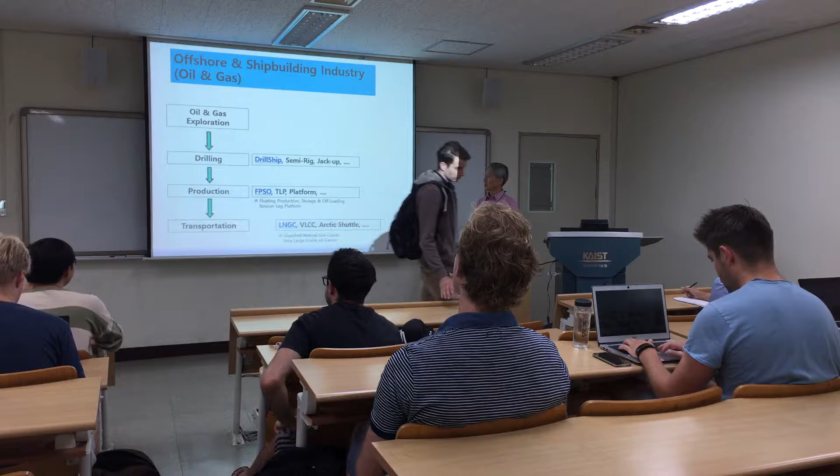In the transportation stage, it's very traditional. You need LNG carrier or crude oil carrier. LNGC is a liquefied natural gas carrier, VLCC is a very large crude oil carrier. Recently we're trying to cover the Arctic Ocean because there are remaining oil and gas reservoirs there.

Now they're including offshore industry along with traditional shipbuilding industry. Shipbuilding division and offshore or ocean plant division are different; they are separated out inside the shipbuilding company.

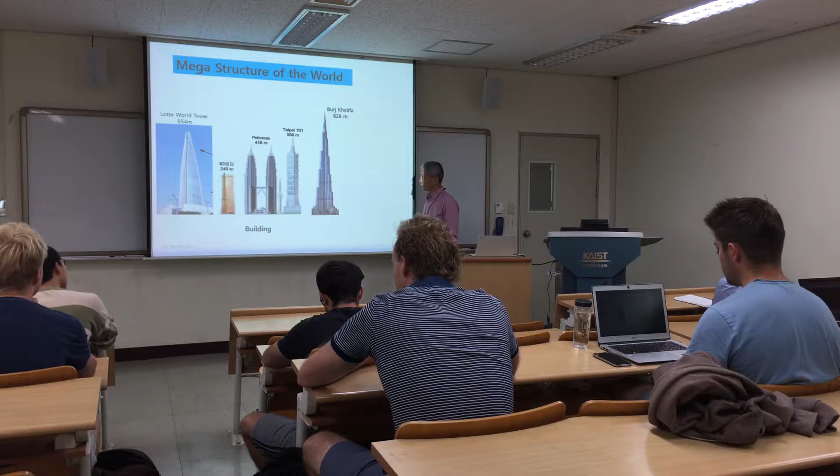Shipbuilding industry too. This is a mega structure of the world. This is the new tallest building in Korea, just opened in the Seoul area. It is about 100 floors.

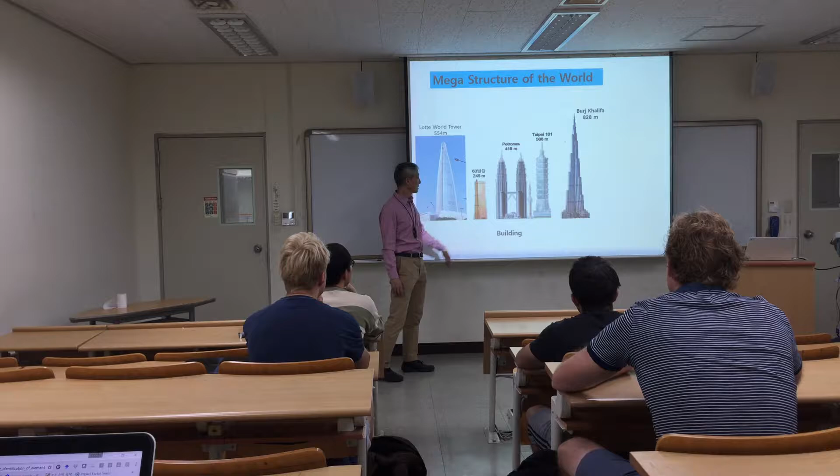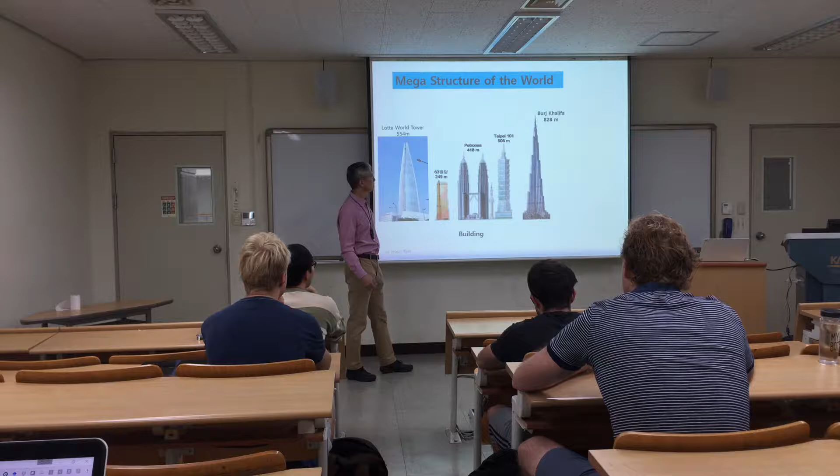Just before, up to last year - sorry, this is Korean - 63 is the number of floors, the building name is the same, and that was the tallest one in Korea. But Petronas in Malaysia, Taipei, and Khalifa in the Middle East are also tall buildings.

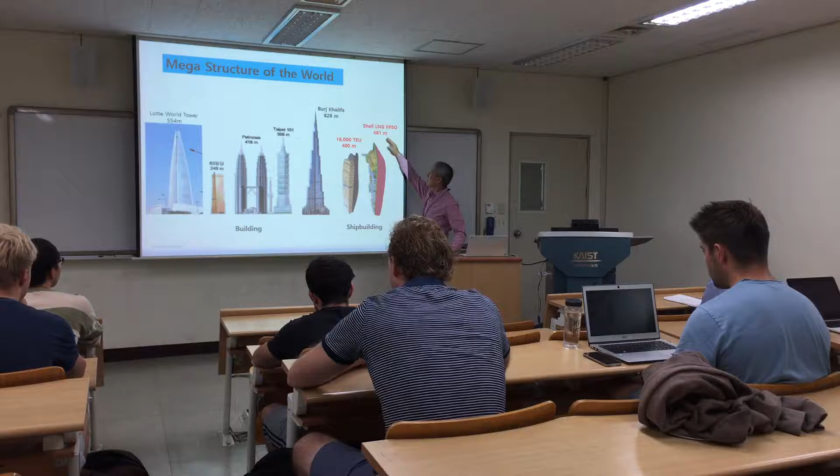Whereas the ships are container ships and FPSO, LNG FPSO - it's big, right? Comparable to the largest or tallest buildings. Bulk carriers are also big.

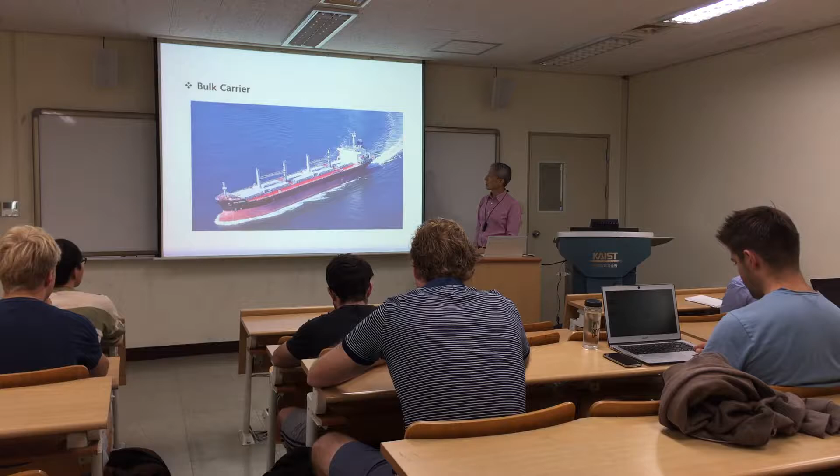Shipbuilding is made of blocks, so we can say block building. That was developed as block construction technology, developed mainly by Japan. They exercised block construction because of the welding technology developed during World War II.

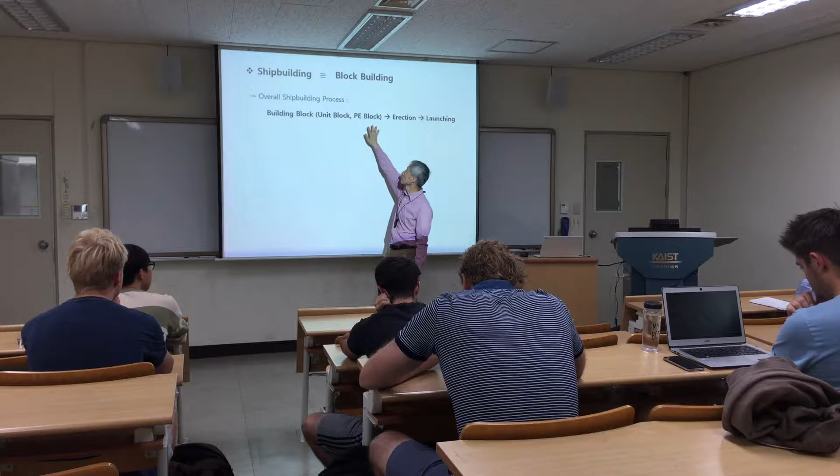In the shipbuilding process, they start from smaller blocks to larger blocks. PE means pre-erection. Pre-erection block is the aggregation of unit small blocks into bigger blocks. Then erection comes, and then launching in dry docks.

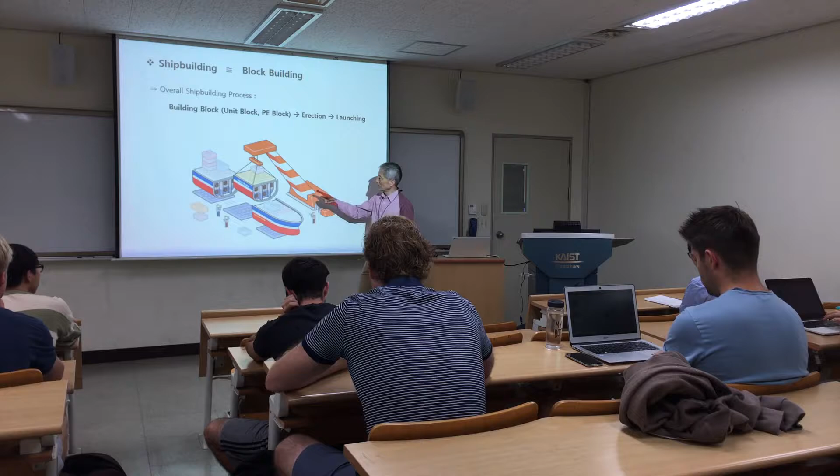This is like a Lego toy, but we can see how ships are built in blocks. This is a very big one, a big block, or sometimes called a super ring block.

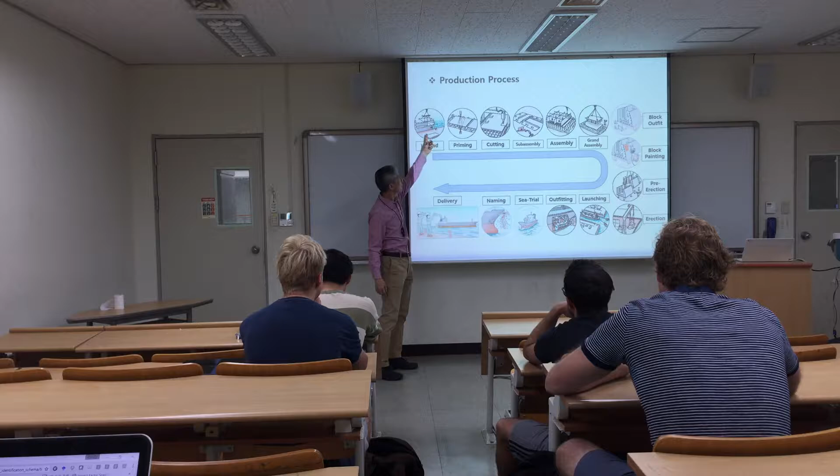This is a more detailed production process: unloading of steel plate coming from the steel making company. In Korea, POSCO is a steel making company. They bring in steel plate, and then priming is a shop primary painting for rust prevention.

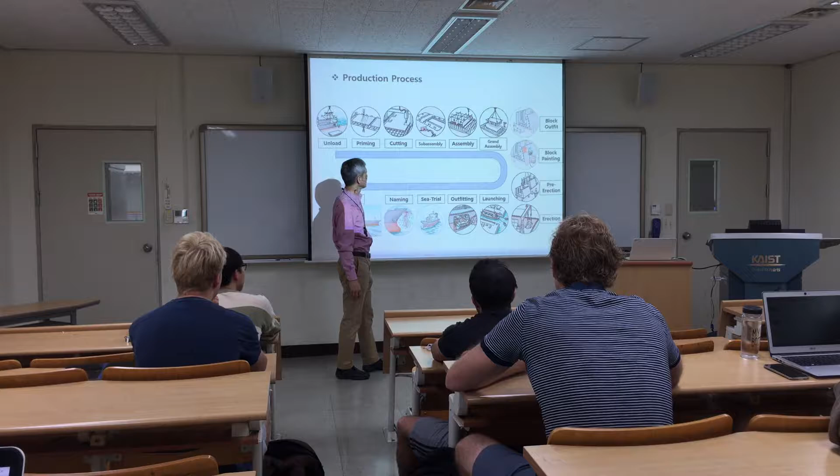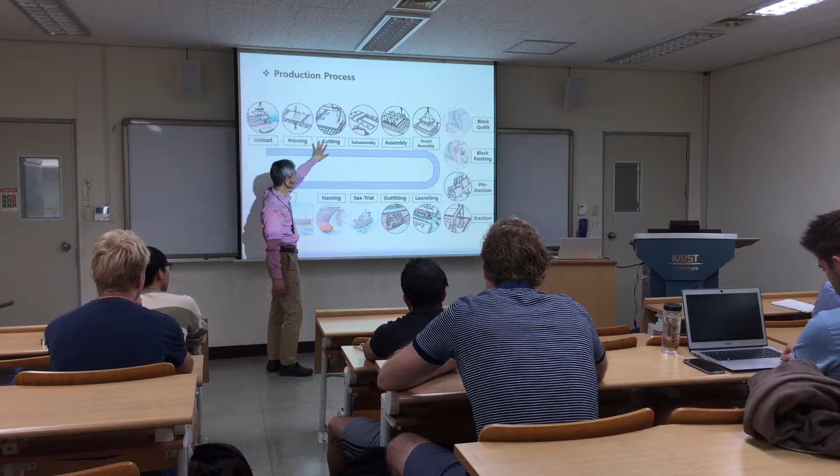Then cutting of pieces, something like angle here. The cut plates are assembled, starting point can be sub-assembly, and then a little bit more into an assembly line. They call these lines of places inside the shipbuilding company: sub-assembly line, cutting line, assembly line. If you have a chance to visit a large shipbuilding company, you can see these divisions and lines.

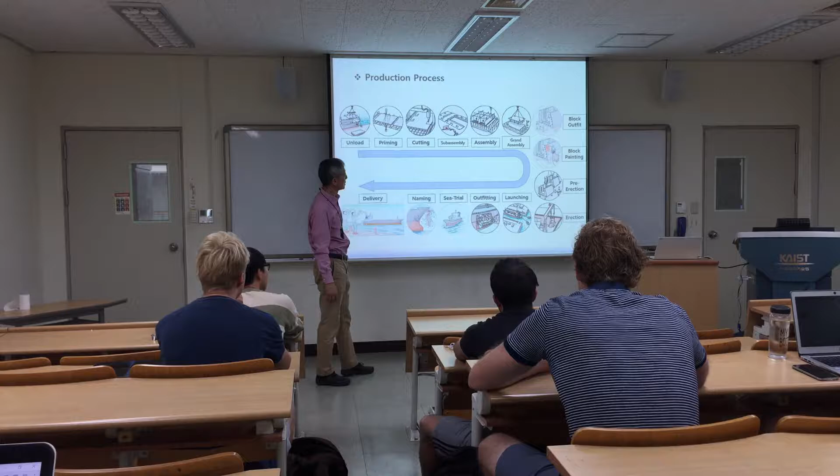And then grand assembly, big assembly - in Korean, 공장. There is a special plant or housing for big assembly blocks, and then that goes outside. There is some division maybe inside here.

So indoor, outdoor - blocks, up to now steel plate for structural assembly. And then they started putting in outfitting. Outfitting means pipe and cables and other things.

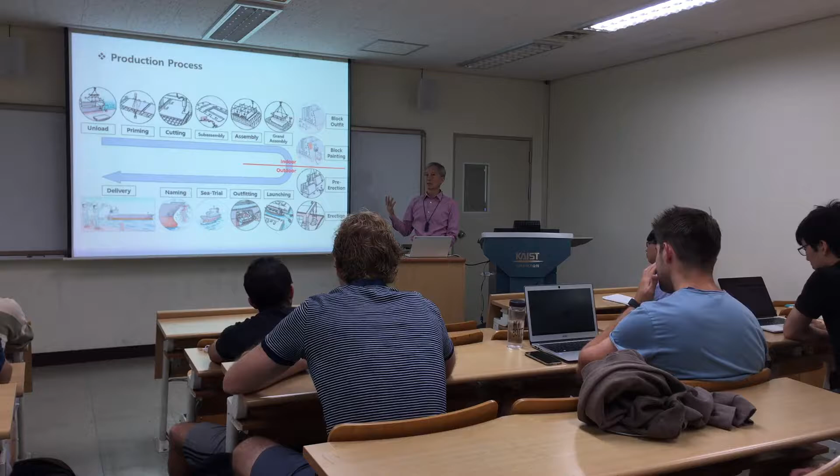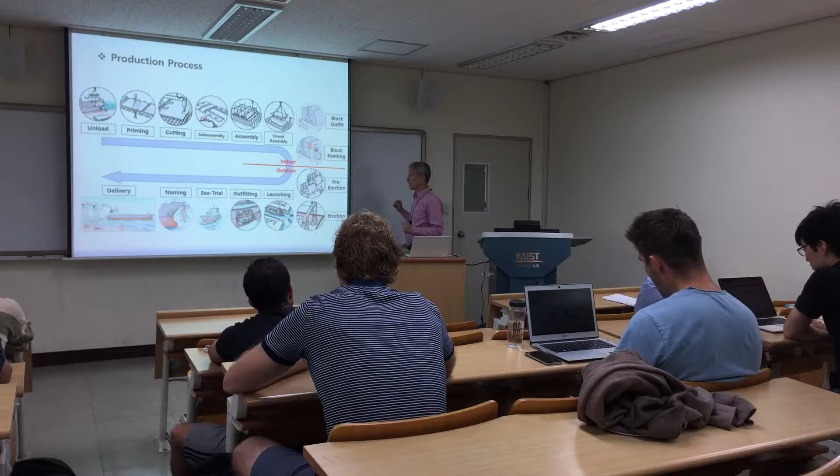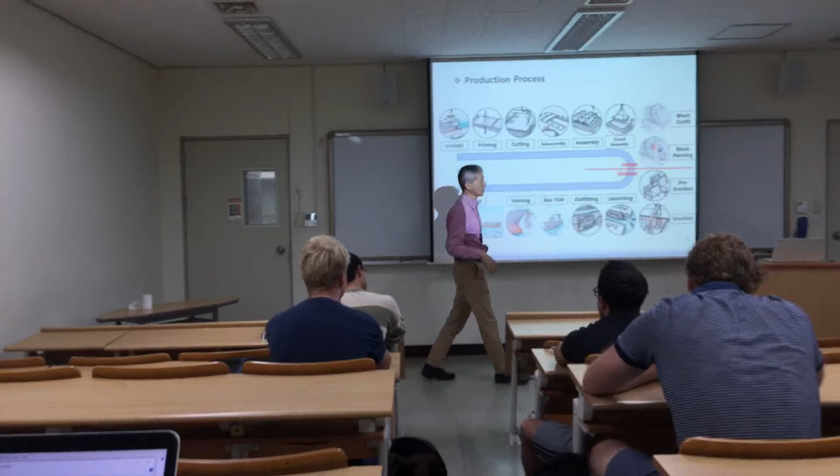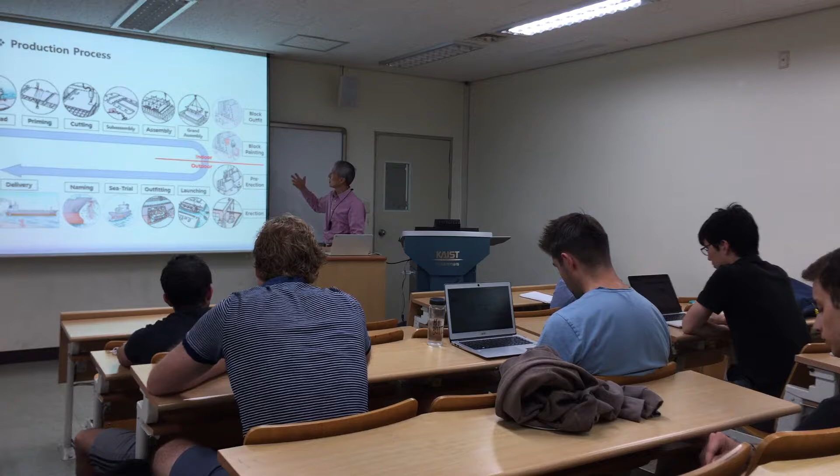You can think about this like building a building. When they build it, they start with the main construction, the main structural body of concrete and steel construction. Then they start to put in pipes, air conditioning lines, cables for electricity, and other things. We call these additional things outfitting, though 'additional' may not be the proper word. So we can divide into two parts: structural part and outfitting part. Cost may be higher for outfitting, but the shaping mainly comes from the structural part. So up to here is structural building, and then outfitting goes on, even though it costs higher.

And then painting - it is the final painting, not maybe final but almost final. This is different from the primary painting which is only to prevent rust. And then it goes outside; this was all inside the housing.

And pre-erection, and then erection. Pre-erection is some more assembly, bigger assembly, big block. This is possible because of larger crane capacity. If you don't have big crane capacity, you cannot do this. Nowadays Korean shipbuilders have big gantry cranes, and they also use floating cranes, much bigger, so the block size is becoming bigger.

When I was young, there was no such process as a pre-erection stage, but this is a new stage, a new process, because of the bigger cranes. And then erection goes into dry dock, and then launching, because water comes in and it floats.

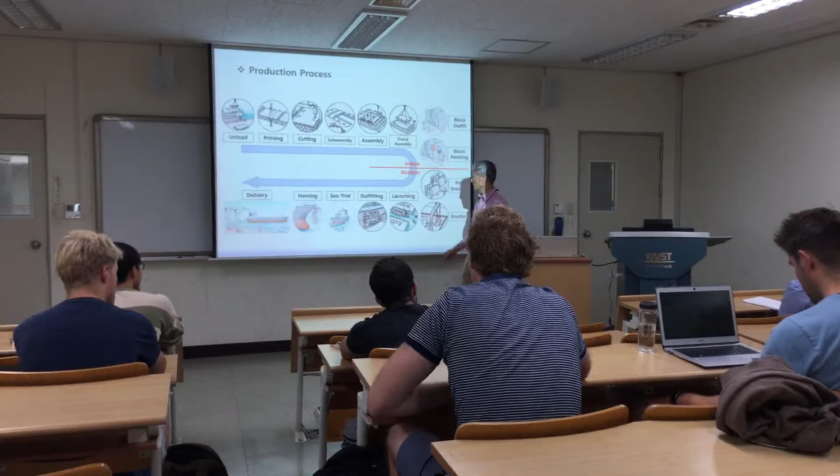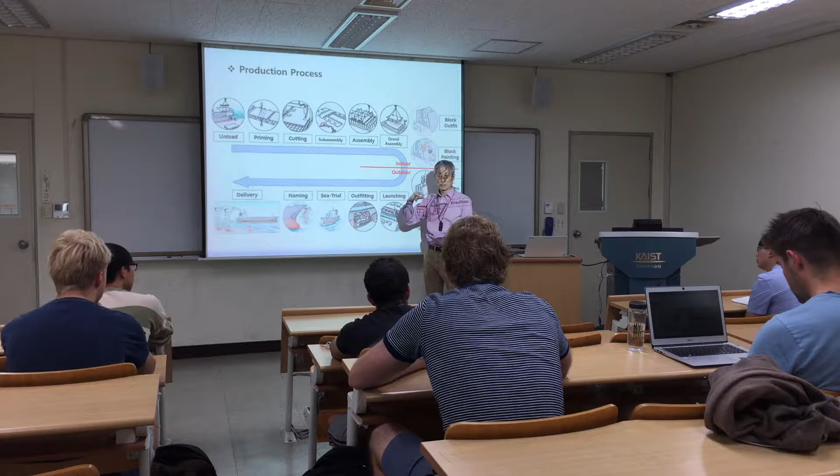And after that, also the outfitting goes on. But I can say that this main engine is erected or assembled inside the dry dock because it's a big item, and also it should be located on the bottom side of the ship. So they need a big opening when the engine is coming in. The main engine is assembled there, but still they need more fittings, such as cabling and piping and control. Especially the control devices and sensing devices should be put in the main engine.

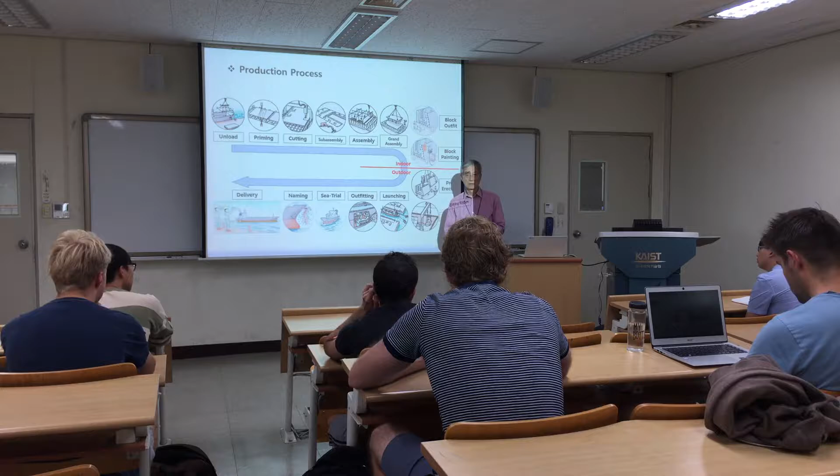And then sea trial, this is an acceptance test, something like that. The owner, the contract side, they should check whether the main contract items such as speed, tonnage, or cargo capacity are matched. That is the final check before delivery. This is just a ceremony.

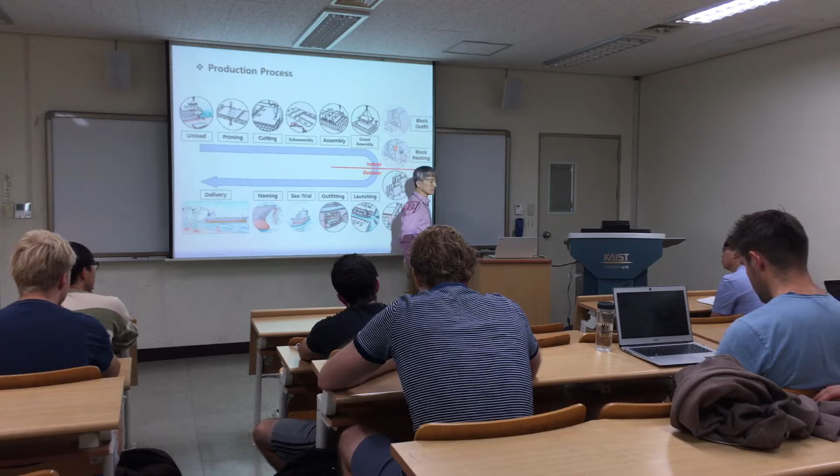Let me see. This is a mega ship, mega float crane, and this is coming from Samsung Heavy.

This is a cutting and also sub-assembly line. This is super ring blocks carried by a Goliath crane. But since it is a dry dock, they still need land-based cranes. But this one is a floating crane.

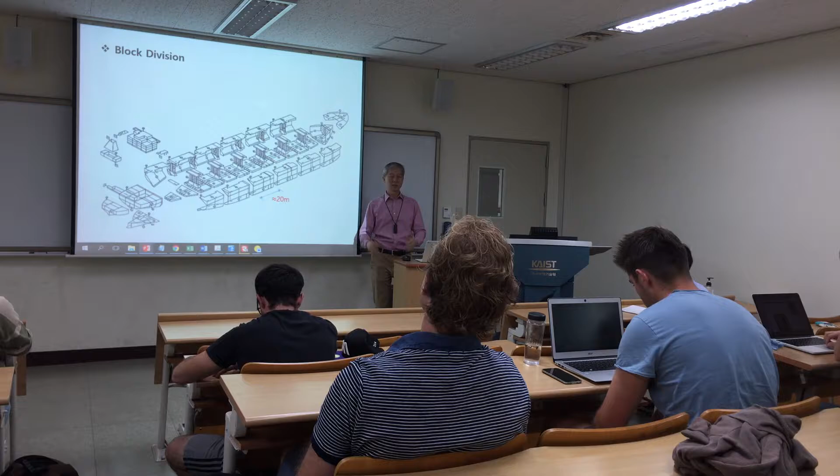Right? That's why they want to make bigger blocks, to reduce time inside the dry dock or crane.

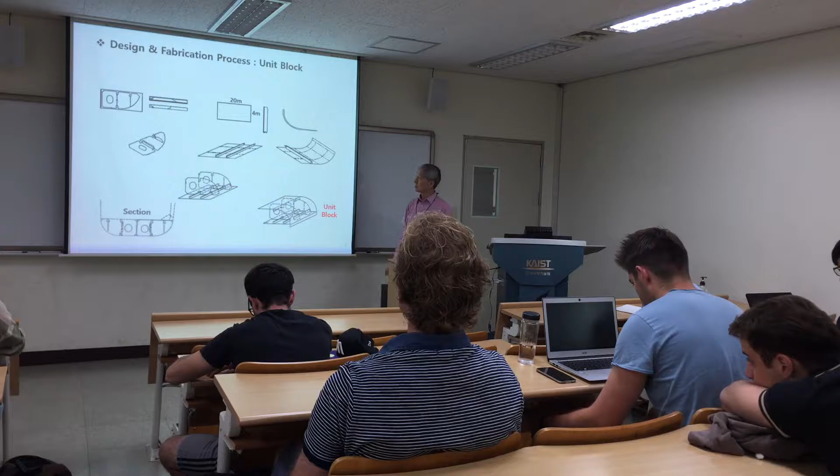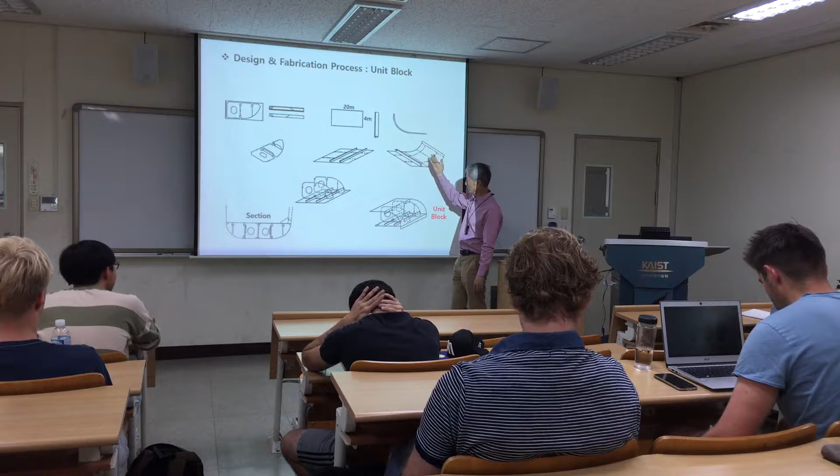So this is a very small size scale piece, and they start from a small typical steel plate, about say 2 centimeters thickness or 1 centimeter, or 2 centimeters - 2 centimeters is around here, right? Thickness of the plate, and then cutting and welding and welding and bending. Right? So this is coming from a drawing or design, right? And then you get the unit block, or say this is sub-assembly, you can say.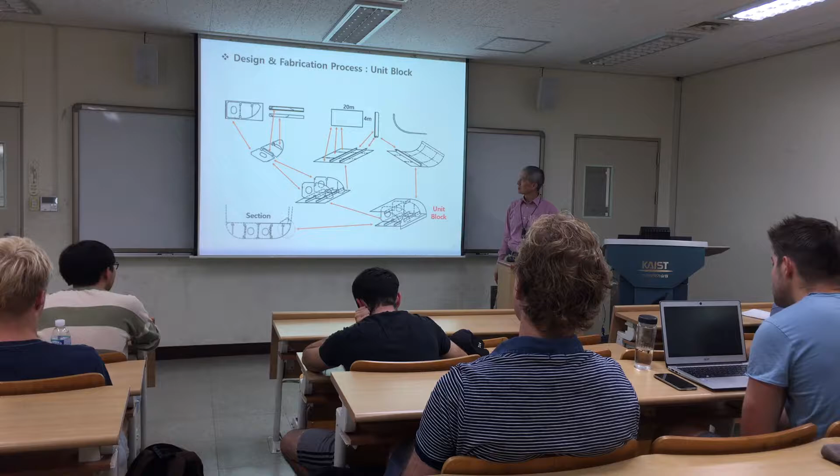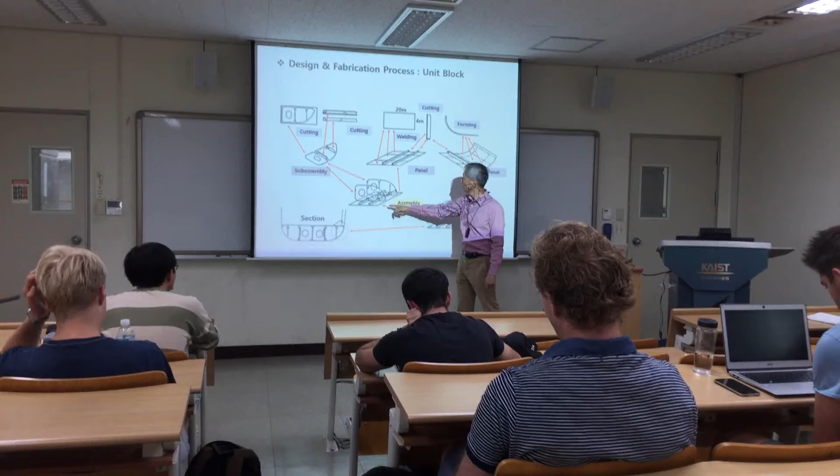And this is coming, the flow chart. Flow is coming from here, right? So starting from the plate, right? Oh, there is more. They call this cutting from plate, and then welding, cutting, forming, sub-assembly, panel line, sub-assembly line, assembly line, in flow.

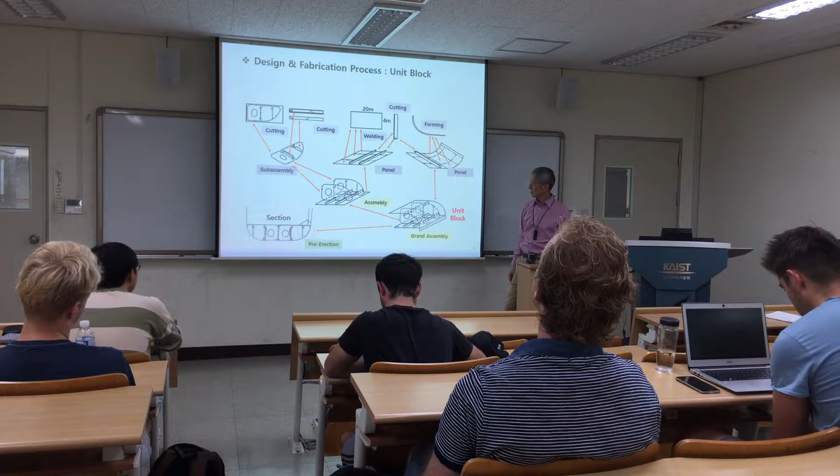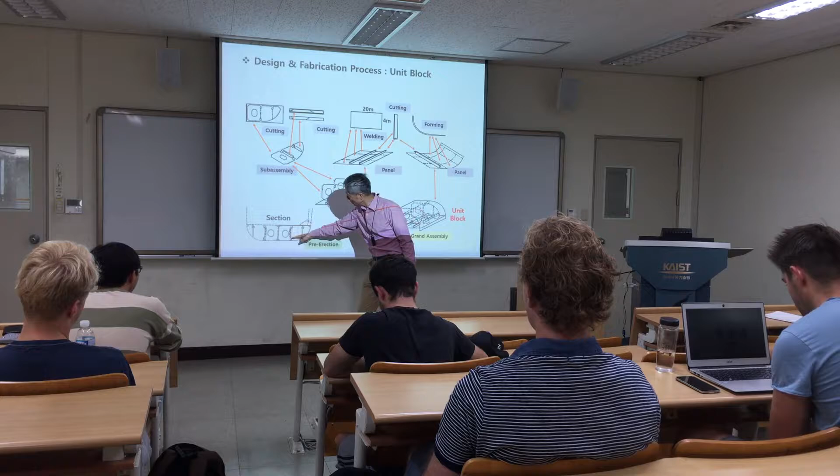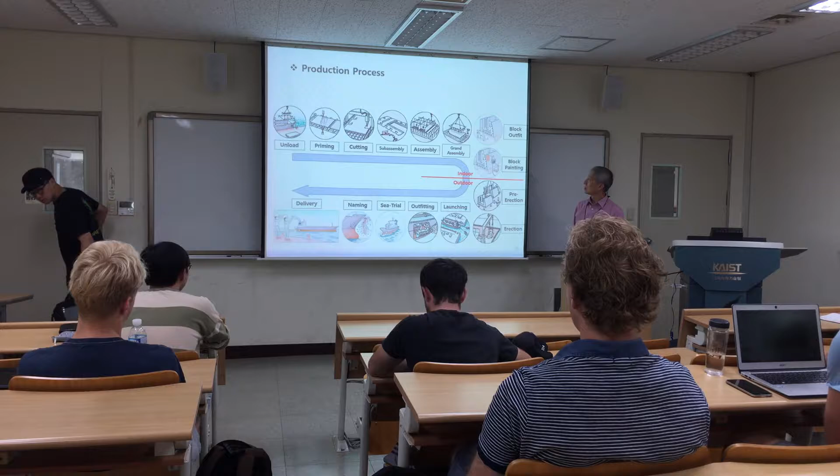And grand assembly, right? And pre-erection - maybe this grand assembly is a block, a portion over here, right? So then they need to have a pre-erection and more assemblies coming. And same picture as before - so it's an indoor and outdoor production process again.

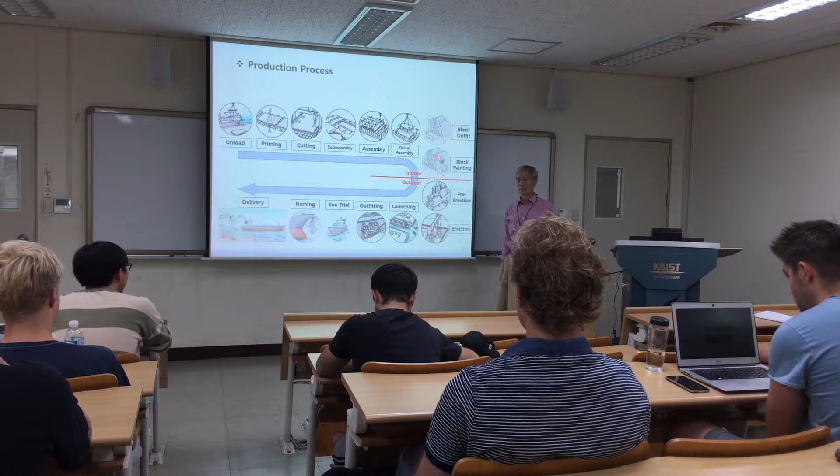So nowadays the crane gives you super blocks, bigger size. The Goliath crane, the limitation of capacity is now around 1,000 tons, less than 1,000 tons - the biggest inside Korea. The land-based Goliath crane is 1,000 tons. So you need to have a smaller, lighter weight block, right, than 1,000 tons. So you can imagine the size.

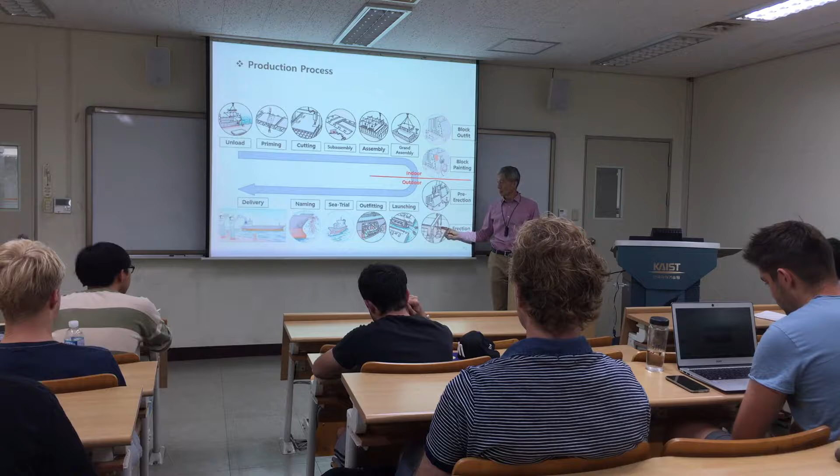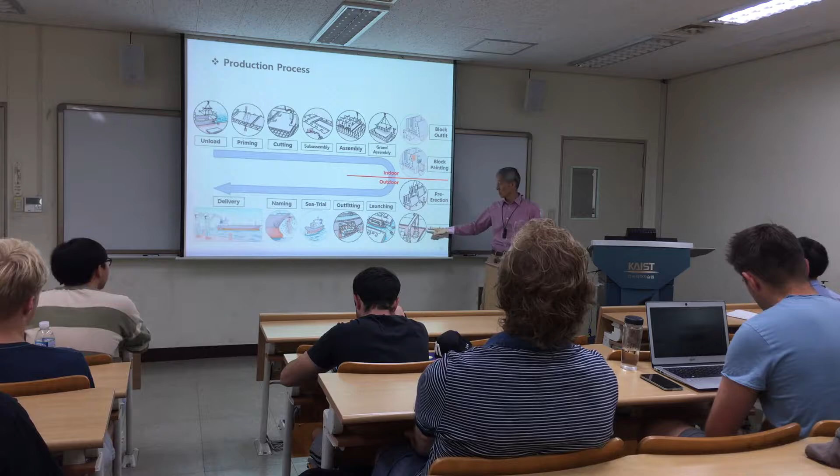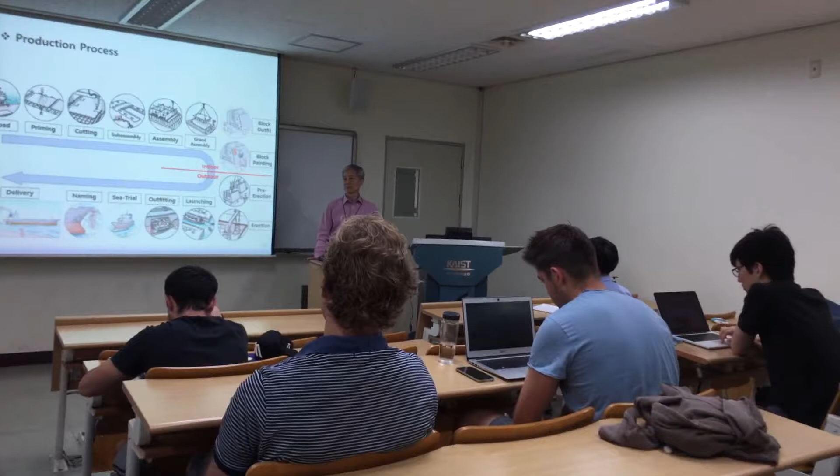But with the floating crane, you say they start from 3,000 tons, 5,000 tons, now 8,000 and even 10,000. So it's 10 times bigger than a land-based crane. So then you can see how big the block can be.

All right, I will continue this lecture about production automation and robotics in the shipyard.

So if you look at the priorities of research and analysis in shipyards, it comes down to the welding, the painting, and the outfitting work you want automated or replaced by robots. Then you start with the easiest: first semi-automation and then full automation. And you start indoor rather than outdoor, because indoor climate is easier to control, of course.

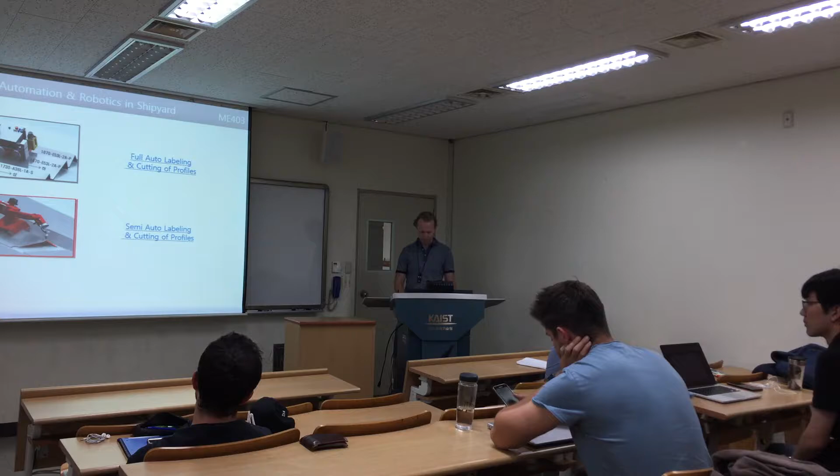Yeah, there's a video about the automatic welding at the shipyard. I'm going to show you this first.

I mean, you can all read what it says. I don't know how to put the volume up.

He says he's going to visit the robot, and makes a bad joke about that man being the robot. It's not that funny. The man says no, I'm not the robot, but he's the operator of the robot. When asked what he does, he explains he has a scanner there, the sensors, and he scans or makes a picture of the metal plate beneath him.

This is the software where you can adjust some parameters, and then you can control the robot and start the welding process.

Of course I'm very dedicated to giving you a perfect lecture, so I took a field trip to the DSME Shipyard, especially for you, to take a closer look at the first steps of shipbuilding.

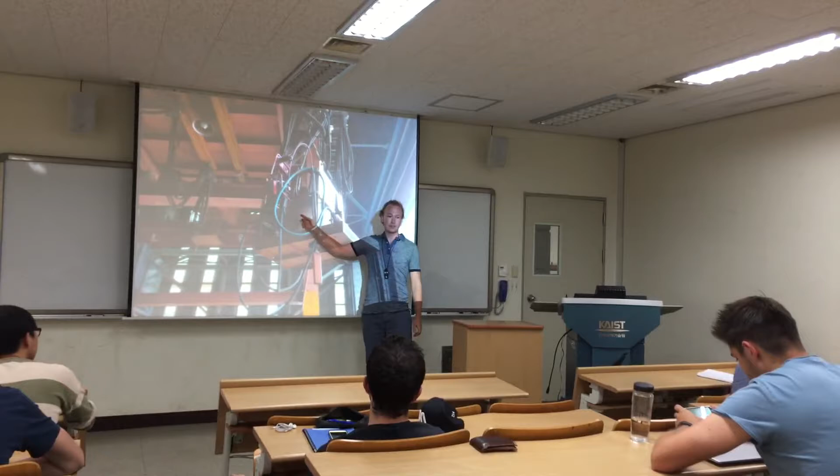This is a zoomed in picture of a welding robot. The biggest part of the welding robot, this and this, is actually the welding material, because they want to keep that close to the robot. The welding thing itself is pretty small.

Here you can see above, all the welding robots are hanging. They can put them down, and the welding robots can scan their environment placed in a space like this. They know where they are, and they start welding. You put them up, and you place them in the next hole.

That's all pretty easy for robots, straightforward, until the moment you have curved parts, like the one there. Then it's starting to get a bit harder.

For example, the placing of a huge curved piece of metal alone is quite hard. All the beams beneath the piece of metal had to be adjusted by hand before they could place the piece of metal on top of it. They call it the jig. J-I-G, jig.

But this is still pretty man-hour intensive, I guess, this welding part, and most of the welding here was still done by hand. So apparently the robots are not that advanced that they can know all the curves they have to make. So only the simple welds can be made by robots. I don't know if it's everywhere, but that was the case here.

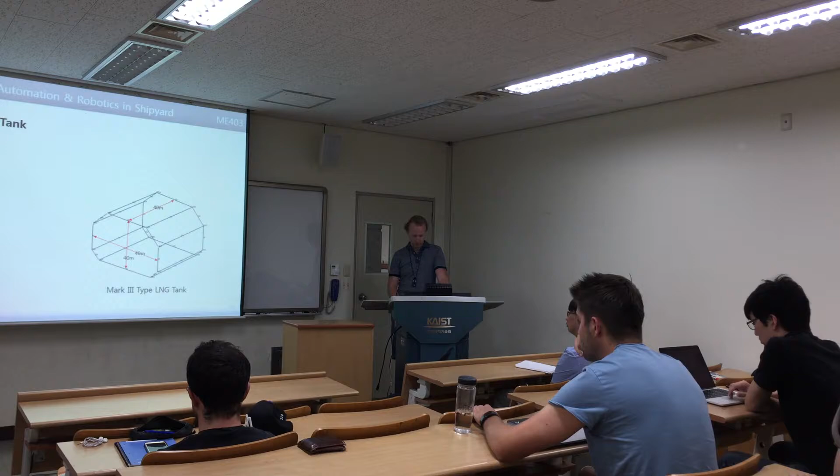And then the LNG tank, which is a pretty big tank. You don't really see it in this picture, but I got a video of the size of the tank. I'll show you that first.

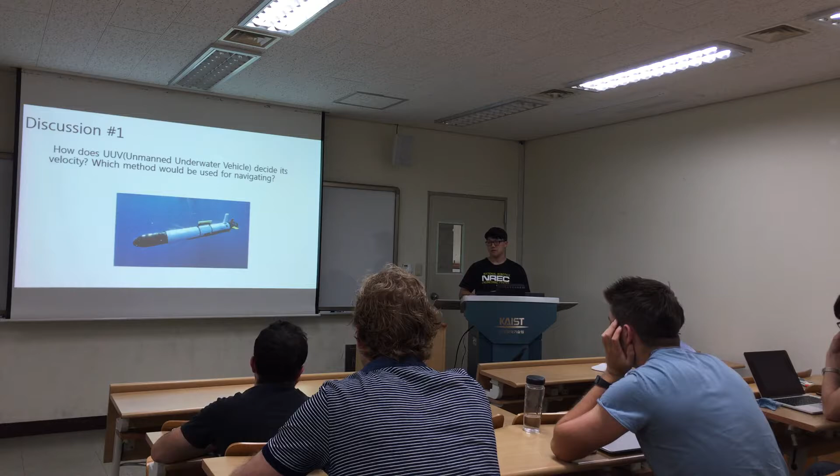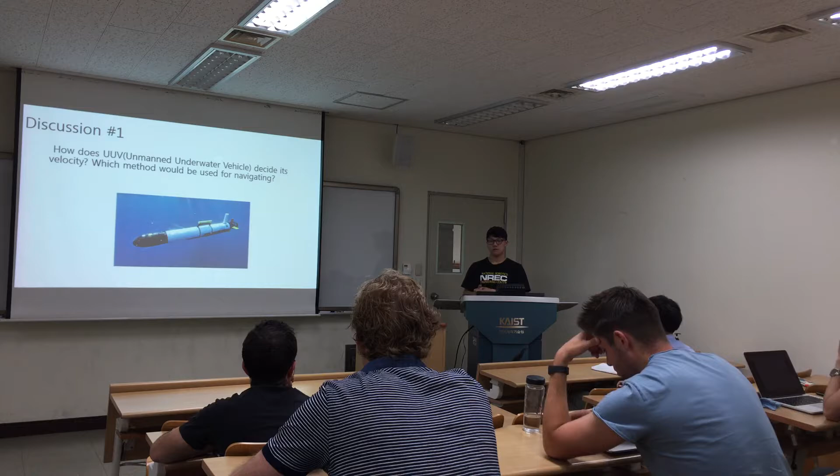Yes. I bring very fashionable ones and the ordinary ones. So you are not - you can suggest a very easy one, I think. You can.

This first one is sonar, equipped sonar. I don't know anything about this. For example, one more thing - like throwing some material and detecting the material's relative position, so that it can measure its own velocity.

What is it? Do you want to get some new suggestions? Yes, what would be the method? How could they measure it? You don't have any idea, you don't have enough knowledge. Okay, then - or do you want to make a debate out of this method? Not a debate. Can I - you were thinking about very common, very easy ones, not too hard, very short ideas, not details.

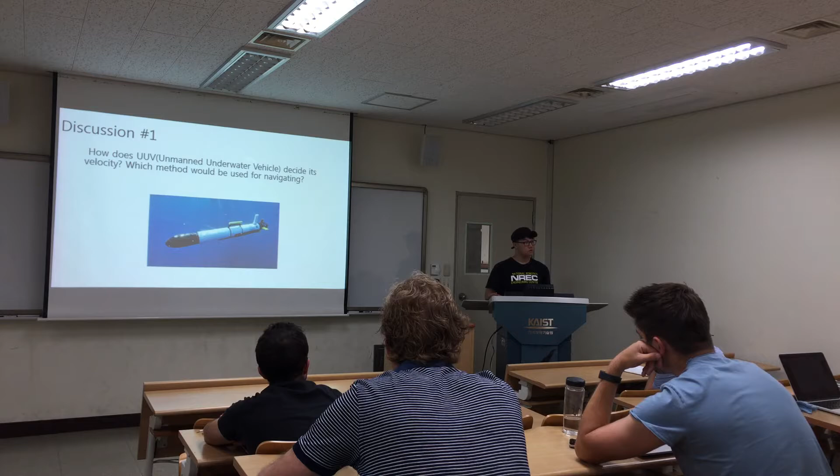Okay, you can think about how the airplane can detect its velocity. I think he told us the same principle applies to airplane detecting. Maybe not making sound, but anyway, they use GPS.

Yes. Underwater you can't use GPS. You can use maps, and it's saved in your UUV, and you can also use the Earth's magnetic field to navigate. So when you combine these two methods, it can control itself and navigate itself.

Yes, and you can measure the velocity by measuring the resistance you receive. So the higher the speed, the higher the resistance, and of course you can know how fast the vehicle is.

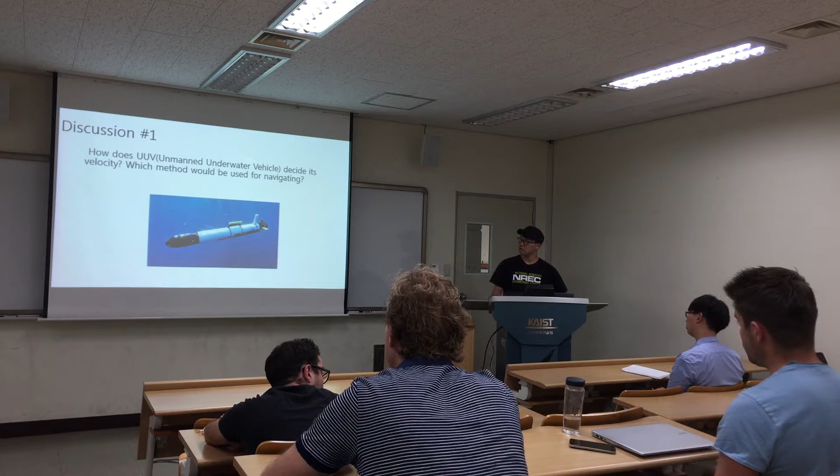Okay, as you told about the unavailability of GPS - for the UUV, GPS is a very good tool for navigating. So if they need very detailed logging, they move to the surface of the water and get information from the GPS.

So yes, they cannot use GPS in ordinary cases, and other things you told about.

What's the resistance used to measure the velocity? Resistance - so the water resistance. Okay.

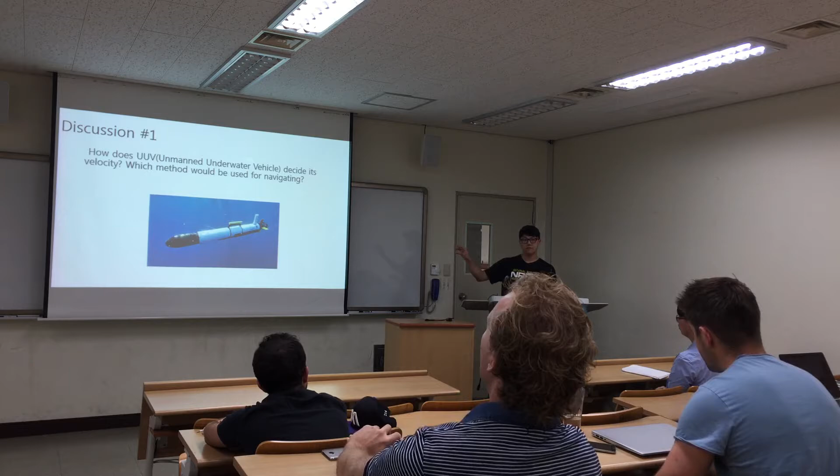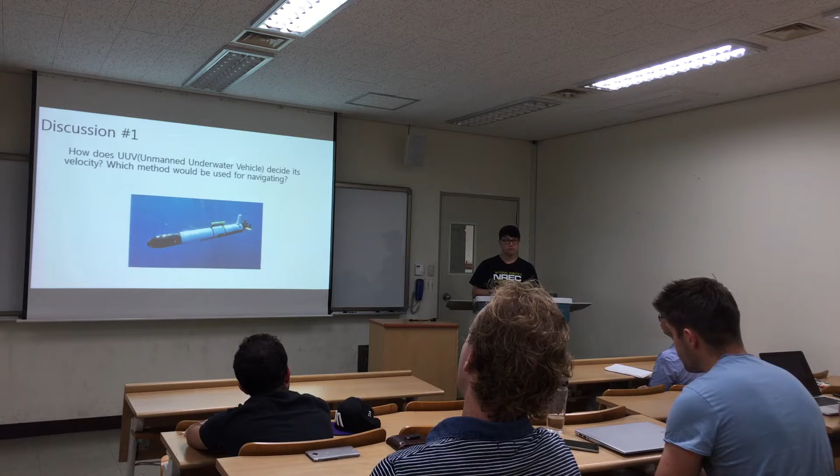So, similar to one way to measure velocity - attach a device that is rotated by the water, so that you check the RPM of the device, and they can also detect the velocity of the UUV, not just the UUV, but any water vehicle.

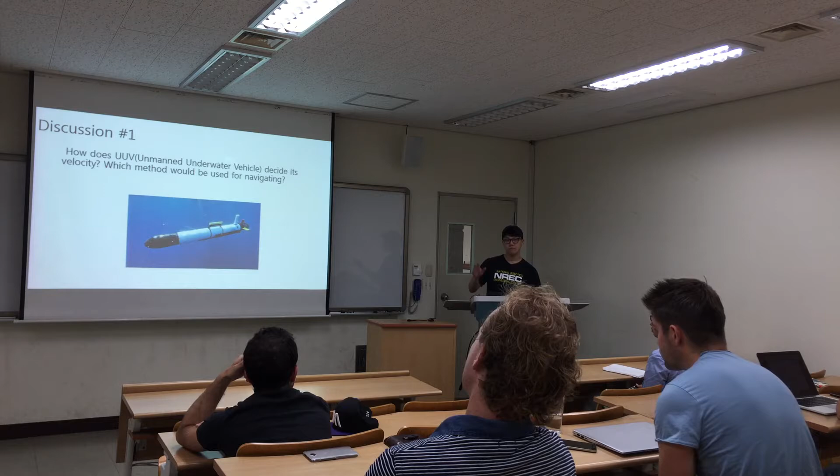Okay, then I have one more topic, so can I move on to the next topic?

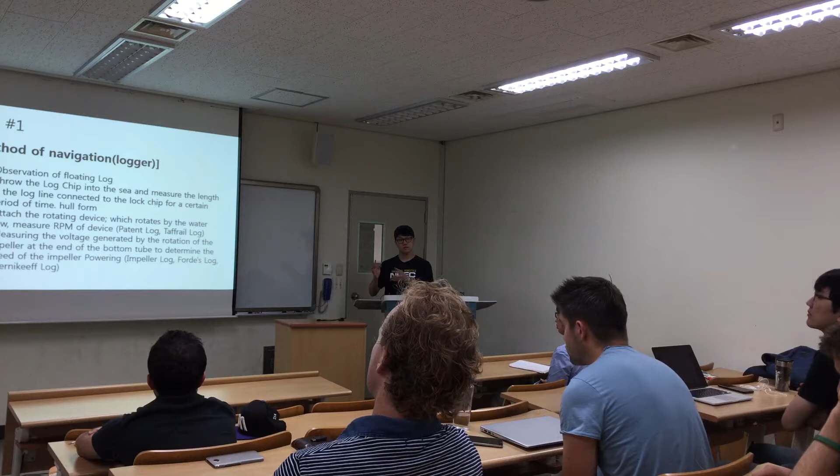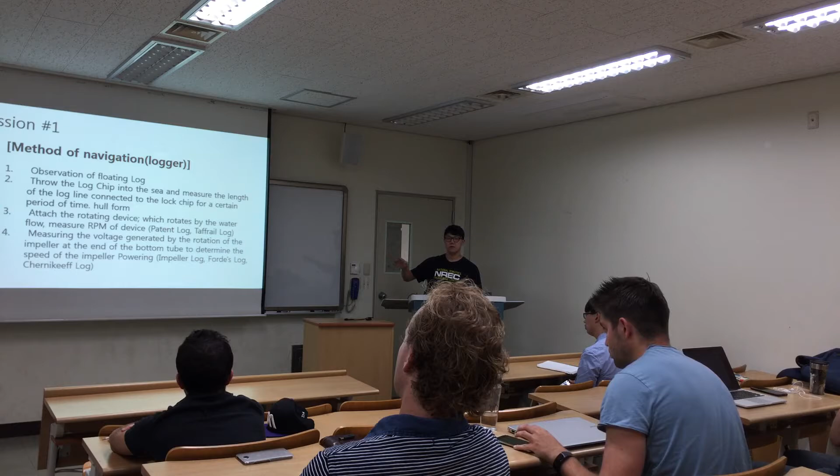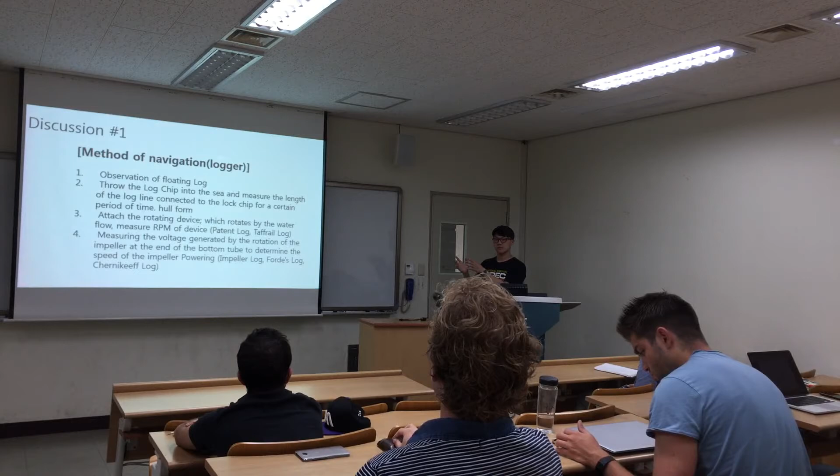I found some solutions that are already used to check the velocity. The first one is a very old method, like the observation of a floating log. That's the reason why the method of detecting velocity is named logger, aka log. So the first one is observation of floating material, and the second one is the log chip, and the log chip is connected to the log line.

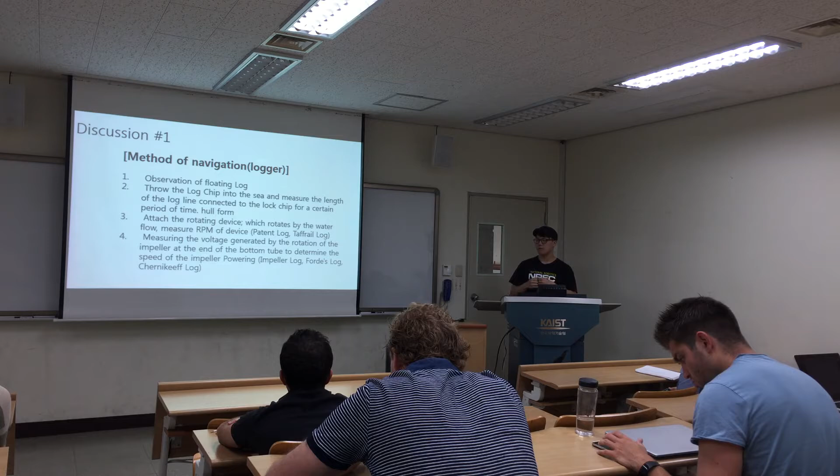So you just throw them in, and measure how long the log line gets out of the vehicle per certain period of time. And the third one is the rotating device I told you about previously.

The fourth one is measuring the voltage. You make an impeller that is connected to a circuit that develops electricity, so you measure the voltage of the impeller's voltage.

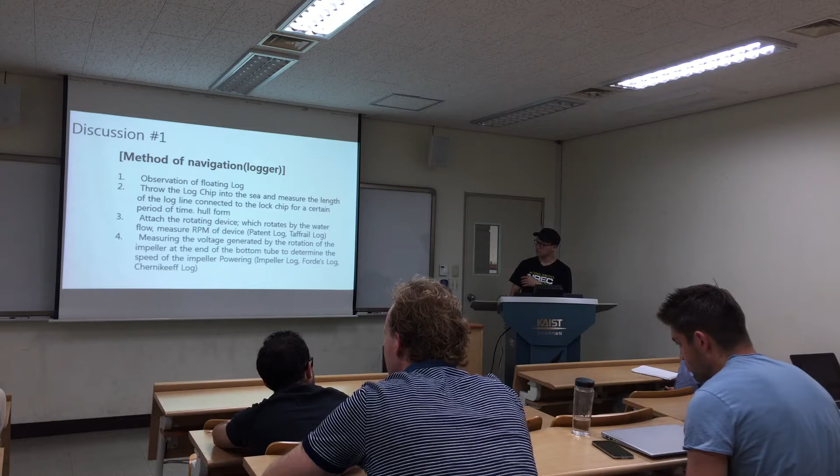And the fifth one is using the pitot tube, so that they can measure the flow velocity. And the sixth one, which is not very ordinary, is to use GPS.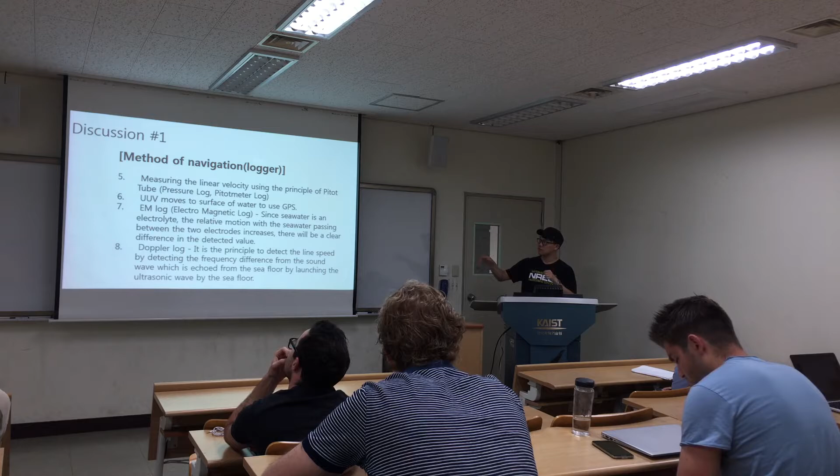They go up to the surface of the water. The seventh one is EM log, that is electromagnetic log, which is put in the water, and since seawater is an electrolyte, moving seawater makes a difference in voltage. And the eighth one is the most popular one, the Doppler log, which I told you about first.

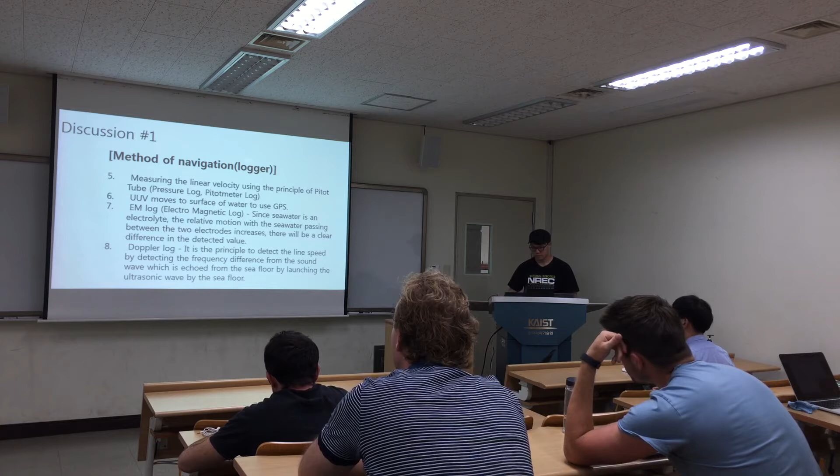There's no line that restricts the topic or the mission. Just tell me whatever you feel comfortable with.

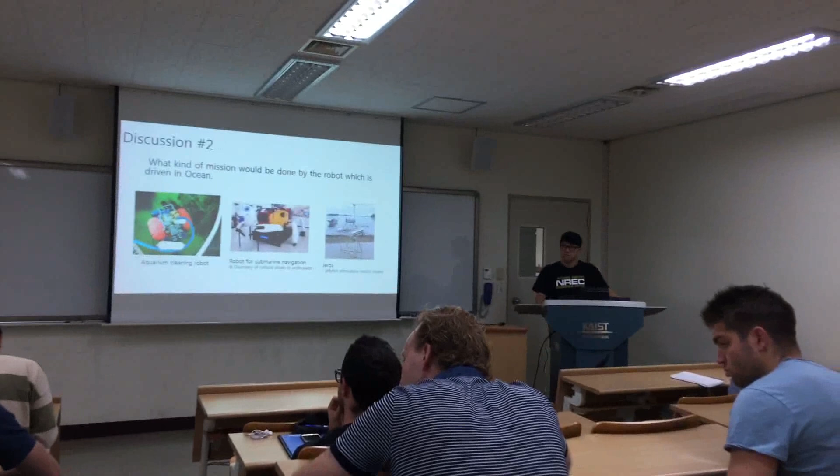And these undersea robots could actually fix the net of the container, to manage the fish farm. I think that's a very innovative and efficient idea.

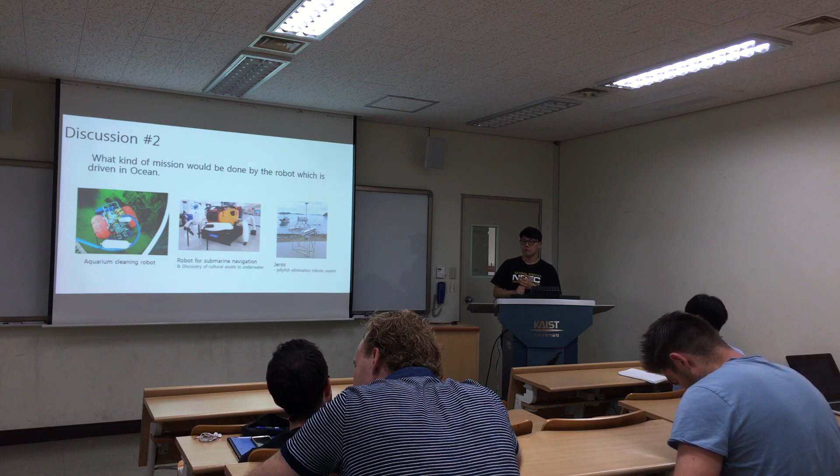In my case, I thought about an animal-shaped robot which can find and record the animal's patterns, movement patterns like that. Yes, I think that's it. Thank you for attending the discussion.